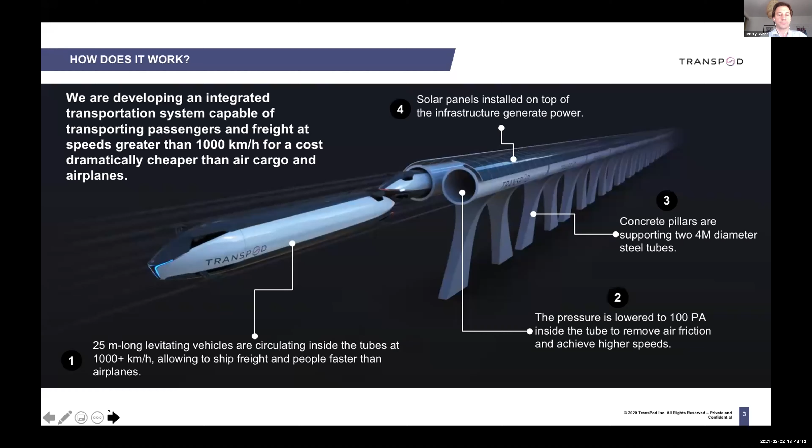I'm dealing with cats, that's probably what you hear behind me.

Briefly, the company was founded about 5.5 years ago, in 2015, in Toronto. We have operations in Italy and France as well. Kyle and I are in Toronto, Dimitri is in France, Augustin is working from his home in the Netherlands. It's global. A lot of people ask us, are you building a line in Canada, is that your main market? Well, of course, we're Canadian, so we would love to see a high-speed transport line in Canada, but there's a lot of other opportunity to explore all over the world.

For example, we've done a feasibility study for a line in Thailand. We're also exploring other countries, Australia, the Middle East. In terms of nice progress we've made, I won't spend too much time on that, but we can get back to it in the Q&A session. We are highly involved in the regulatory work at the French and European level, also a little bit in the US, and we're starting to work on the regulatory projects in Canada as well.

What is it for? As I said, passengers and cargo. We're not only transporting people from point A to point B or between cities, but we can also make good travel time. That's very important because we can replace, for example, airplanes between various cities.

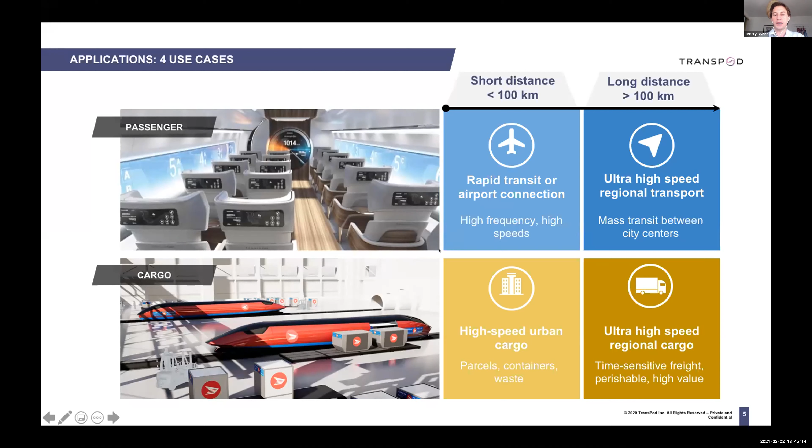That's a little bit of marketing about Transpod. Why we think we're better than the competition is because we have a few unique patents that place us above the Hyperloop world. That was the idea of Ryan when he started the company - he's our CTO. He started off with a blank page. He didn't think we should start again with existing concepts like the maglev concept, for example. Maglev exists, it works, but it's very expensive. That's why we don't have maglev lines - well, there's one in China, but that's it.

So the whole idea was to think, how do we make something levitate in a tube that's almost vacuum? How do we transmit power to the vehicles? How do we make that happen? And that's how we had some key ideas. Well, Ryan had some key ideas, and some people like Kyle, for example, put these ideas literally in motion. But he'll tell you more about that.

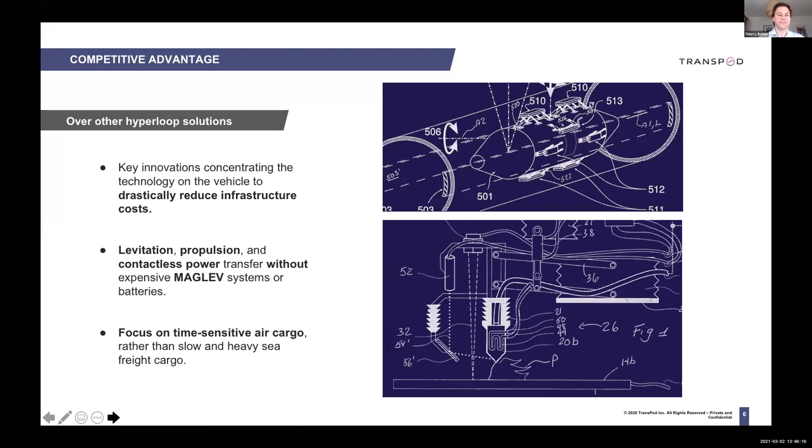In Canada, we would love to build a line between Toronto and Montreal with a stop in Ottawa. That would be nice, but it's a little complicated since we're dealing with two different provinces, so we're still working on that project. But today, the most advanced project for us in Canada is a line between Calgary and Edmonton. We managed to get the government of Alberta on board with the project, so they're officially supporting us.

Part of the feasibility study is also to see if there's interest in having a station in Red Deer, a small city halfway between the two main cities of Alberta, but it comes with a cost. That's why we're conducting this feasibility study, to see if the line is profitable and if it's interesting to have an additional station in Red Deer, for example.

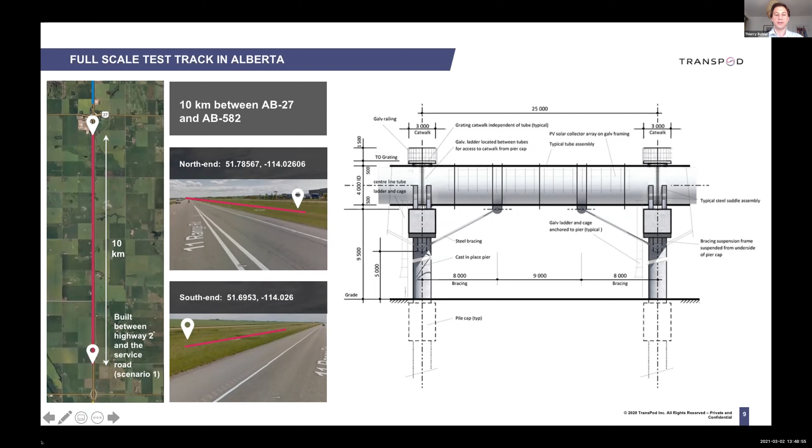We quickly realized this is going to take a few years. So the main milestones for us are 23, 24, to have the certification for the transportation system in Canada. Then we can start building the test track, and finally we can start building the line. Right now we are hoping to be able to operate the line in 2031, about 10 years from now.

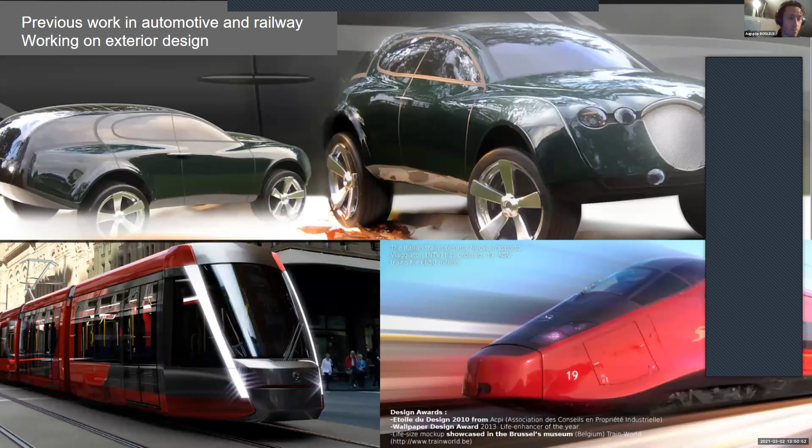So hello, I'm Augustin. I'm an industrial designer, I'm the director of design, and I will present you what design brings to Transpod. I'm 39, I'm from France, and I live in the Netherlands, as Thierry said.

I have a lot of experience in transportation industries. I started with car design for Jaguar, then quickly moved to the railway industry. I joined the company Alstom, where I designed trains for 15 years. I designed metros, tramways, mainline trains, high-speed trains, and also freight locomotives. It was great to create vehicles for various locations in the world.

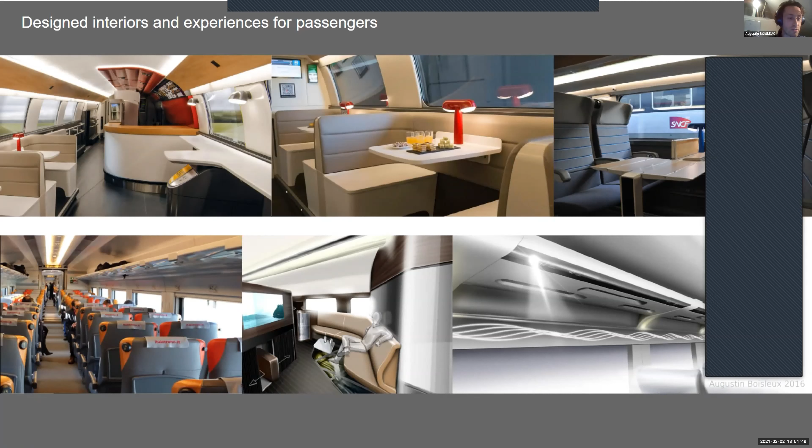Not only the exterior—I spent a lot of time creating interiors too, from economy to business class. I learned a lot on how people move and what could be done to improve their experience. However, I had to work within the limits of a system shaped for centuries. There are a lot of limitations that can't be overcome due to existing infrastructures, technical constraints, regulations, restrictions, etc.

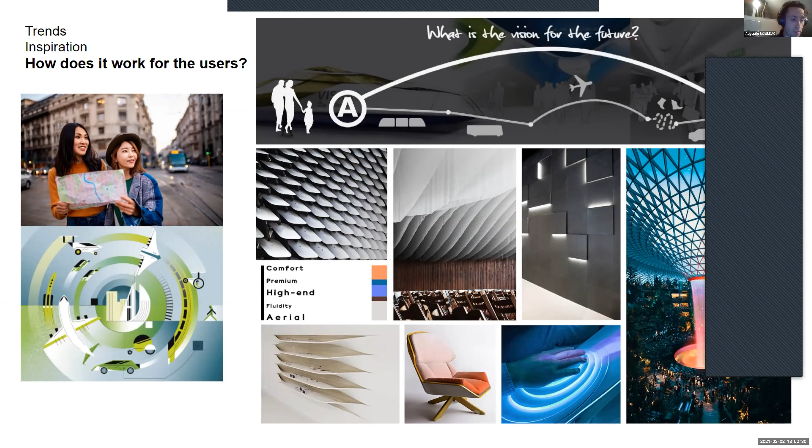So we also create scenarios where we try to imagine all the passenger types going through any kind of situations, to make sure we improve the way people travel. We keep in mind all the inconveniences we can meet when using trains and planes, to make sure we solve them. We keep a holistic point of view—the tangible part, the digital part, the infrastructure, the vehicle, the other modes of transportation connected to it, etc. We try to map everything to make sure we have the best overview when creating solutions.

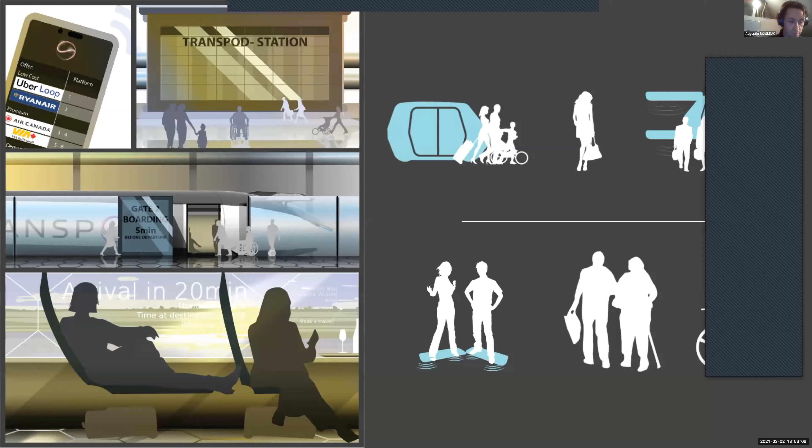So from that analysis, we start conceptualizing and shaping our ideas. It's hundreds and hundreds of ideas that are shaped, simply using at the beginning a pen on paper. We integrate step by step all the engineering inputs provided by my colleagues. Everything from the previous analysis is central, and the goal is to create a product that is the best solution—especially, this is the industrial designer's goal, to create a product from the user's perspective. That's what we really try to solve.

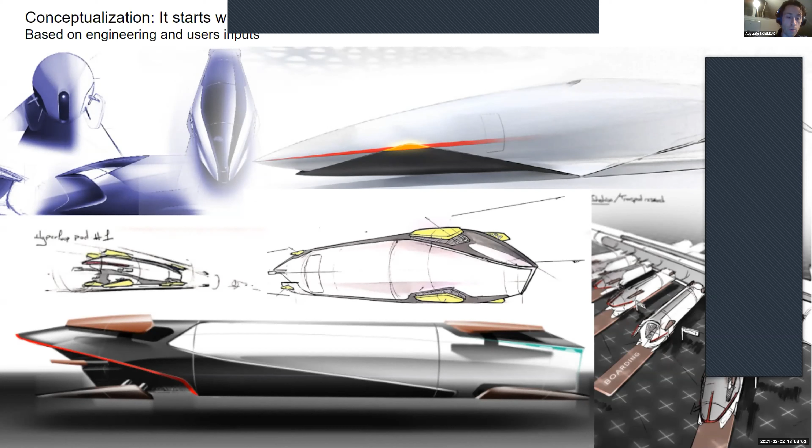So it's also important to give it an inspiring look that carries its function. It has to show its function and communicate its value, as well as the company's value.

For the interiors, the process is the same, but we have a greater focus on the passenger experience. We first need to develop the most optimized architecture that will allow a high level of personalization to meet the different needs and future types of travel. We want to make sure that even when the system is saturated with passengers, the experience will still be superior to what already exists.

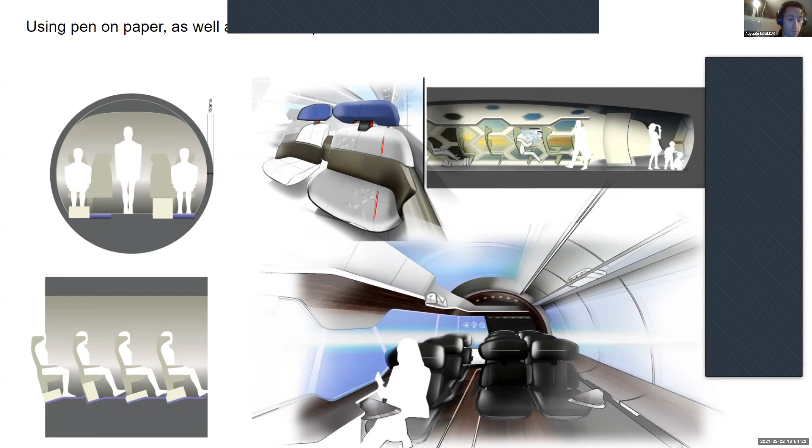Of course, everything here is still preliminary work, but it's going on step by step. So after the sketches come the 3D modeling step, where we define more precisely the different aspects of the vehicle. We put together all the engineering inputs and check how it works, and try to keep the vision alive.

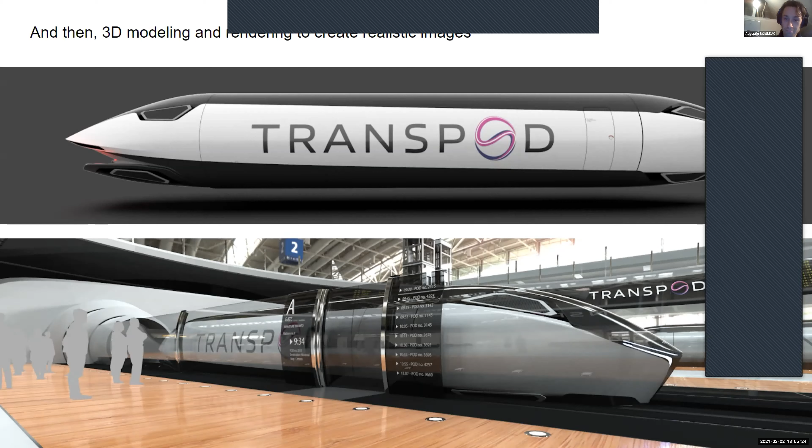And yeah, coming soon to your place. Thank you.

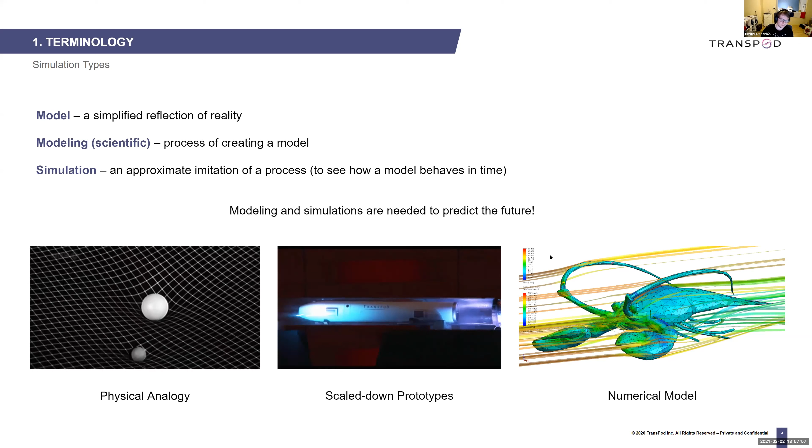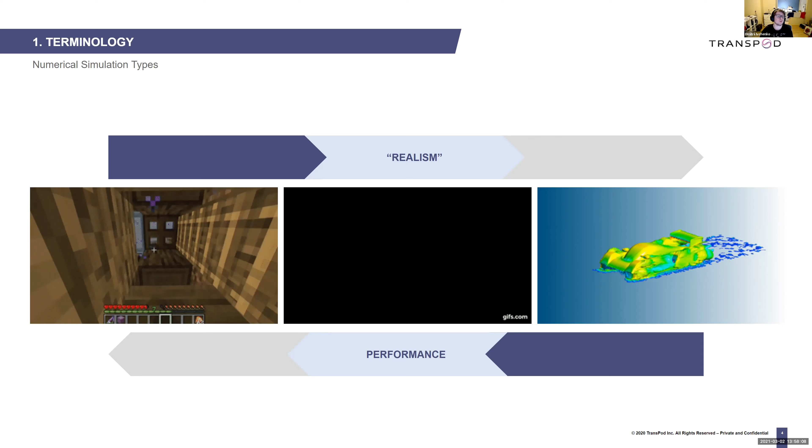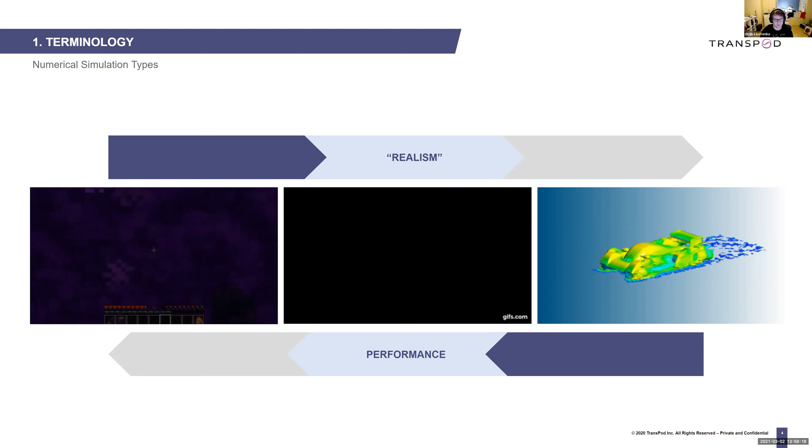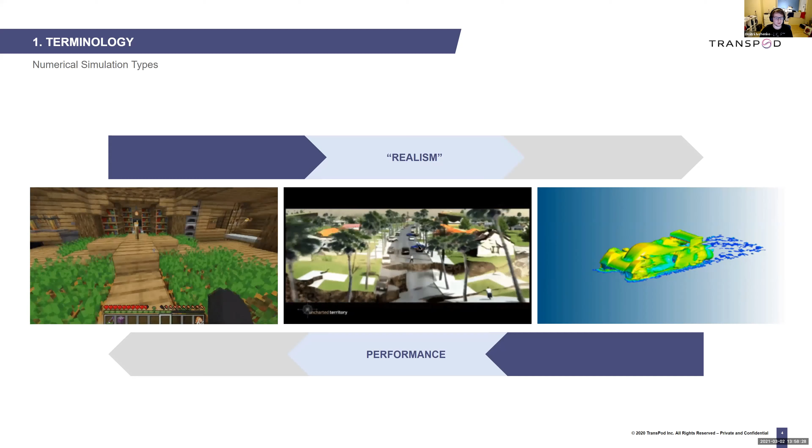Numerical models could be roughly split into three categories based on their degree of realism and the computational power required. On the left of the spectrum, we have video games, the least realistic physically, but they can run in real time so they don't require overpowered computers. In the middle, we have visual effects and computer graphics, where the goal is to look realistic but not necessarily have realistic physics. Thus, we require more computational power, like days and months of computation to produce these pictures.

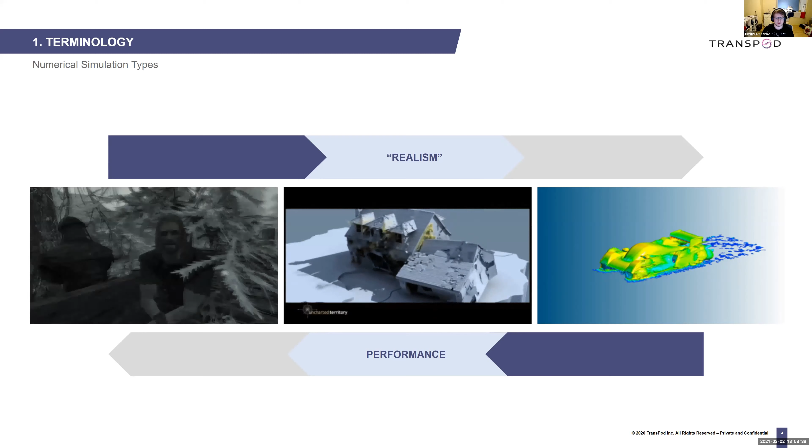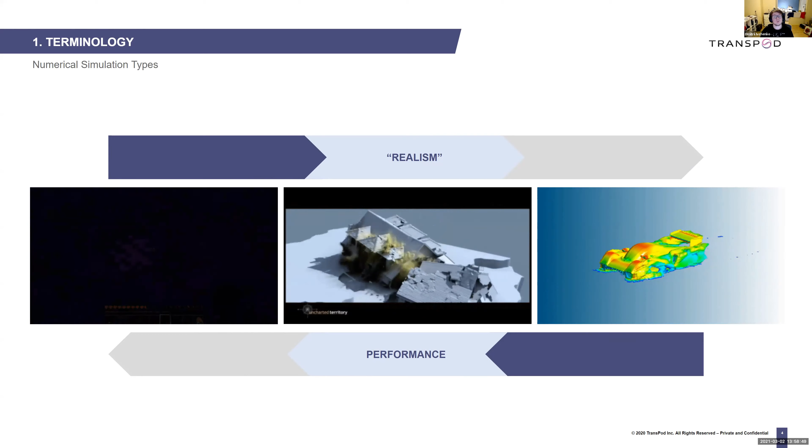And on the right part of the spectrum, we have modeling for engineering and scientific purposes. These kinds of models could be potentially the most advanced, but in the worst case they can require from days to months or even years of simulation time.

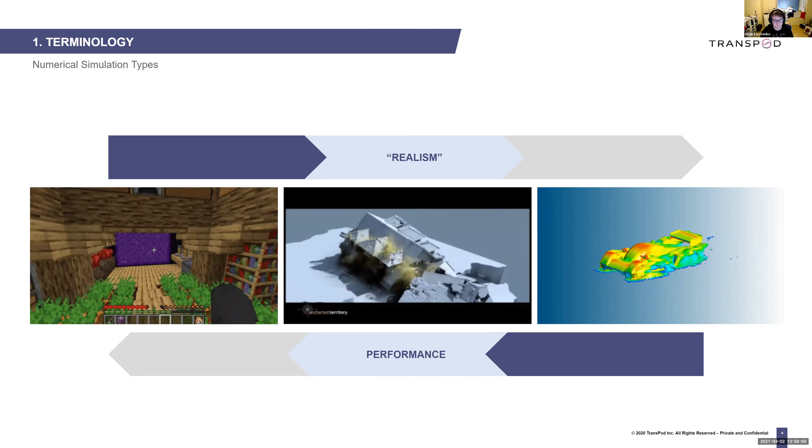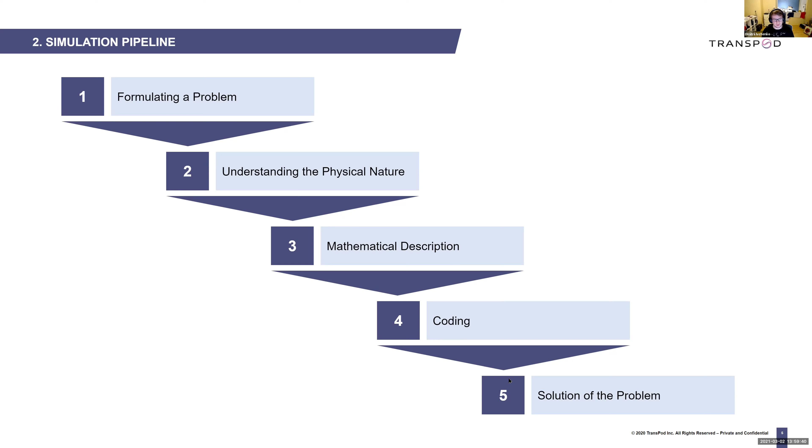But regardless of whether you'd like to make a video game engine or simulate a vactrain, you're likely to follow the same algorithm. First, you've got to formulate the problem you'd like to solve. Then you should analyze the physical nature of this problem. Next, you should describe the physics using mathematical apparatus. On the next stage, you have to interpret this mathematics to the computer—write it in a form the computer understands, basically by writing a computer program. And then you have to use this program to solve the initial problem.

So now let me show you how it's done based on the tasks we have at Transpod. Here is a simple example about predicting the tube surface temperature when it's exposed to direct sunlight. I received this task because our engineers needed to estimate the maximal temperatures of the tube and also to see whether they should paint the tube or if it's fine unpainted.

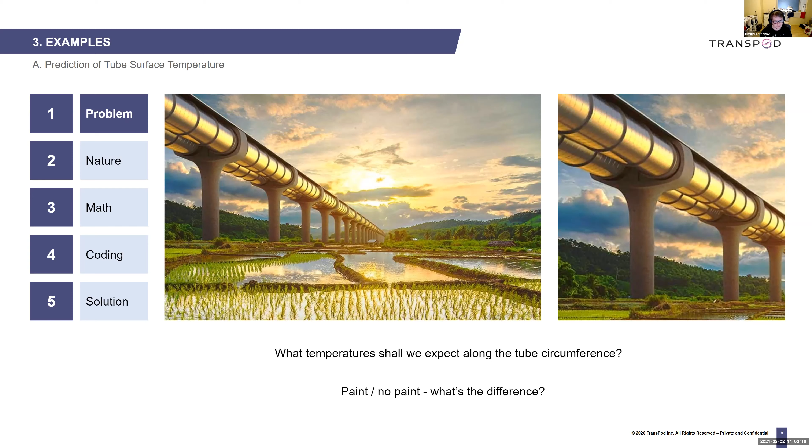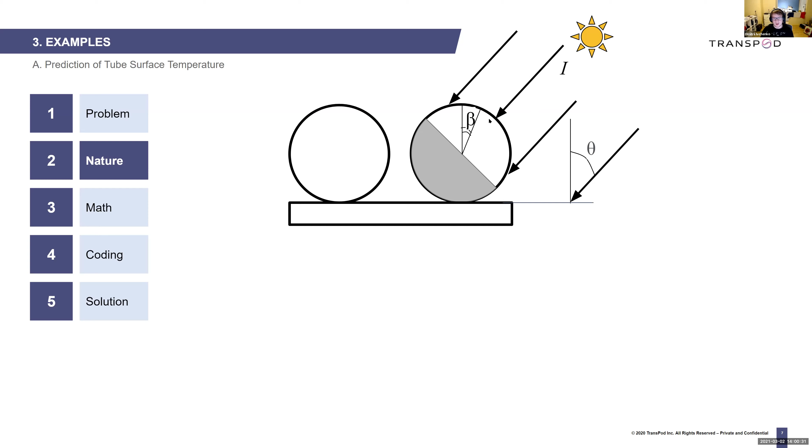So the first thing I did was analyze the nature of the problem. Here are approximate representations of the tube. Here's the sun and the sunlight hitting the tube surface. Let's consider a small segment of the surface and see what happens here.

So we have sunlight arriving at the surface. Part of it is reflected, another part is absorbed. The absorbed part heats the surface, so it's an energy gain. At the same time, the same piece of tube loses energy due to heat exchange with the surrounding air by convection and also by thermal radiation. So this forms an energy loss, and the resulting tube surface temperature could be found within this balance.

So if we write the well-known physical laws that describe these processes, we can get such a balance equation. I won't describe every letter here—all you have to know is that there is only one unknown here, the surface temperature. And it's up to us to solve it and find the result.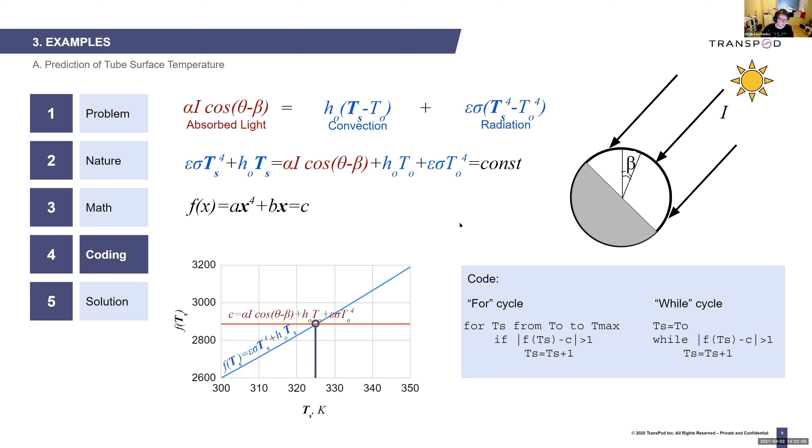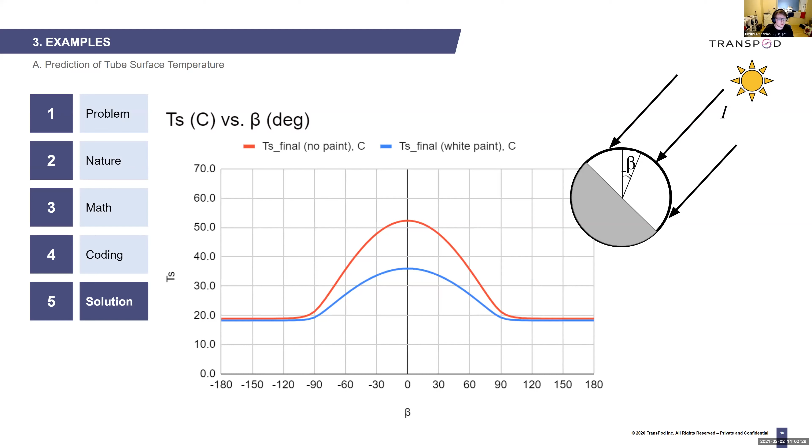Now let me show you a more complicated example, really briefly. It's the main thing I do at Transpod. It's about fluid dynamics, or hydrodynamics, or aerodynamics.

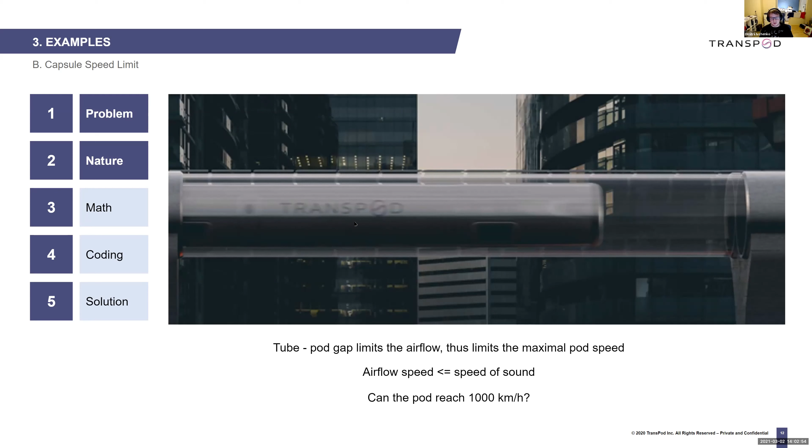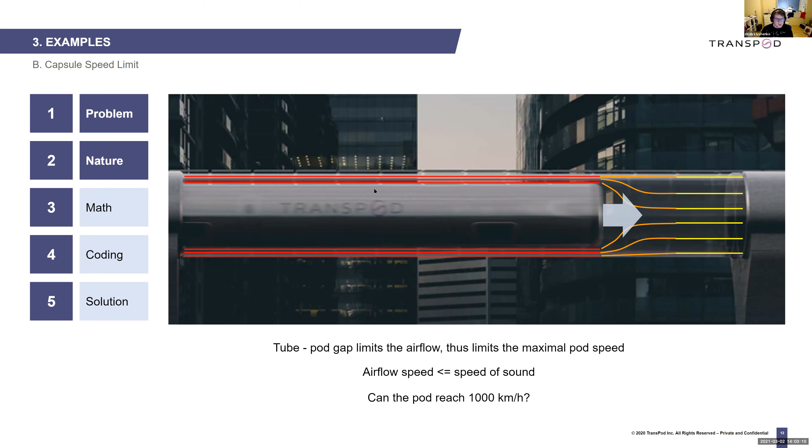Let's consider a pod that moves inside the tube with a high velocity. When it moves, it displaces the air, so the air has to squeeze through this gap, and while squeezing it accelerates to high velocities as well. It appears that the velocity of the air that squeezes through this gap is limited, and this limit is the speed of sound.

This creates a problem because it limits the maximal speed our vehicle can reach. So the question we wanted to find the answer to was whether it's possible to reach 1,000 kilometers per hour, as it's a big marketing point for our vehicle.

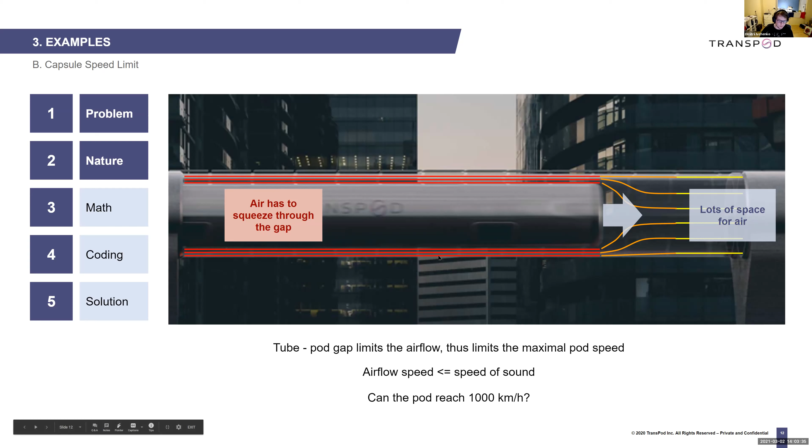In order to do so, we have to solve this fancy system of equations, with these three being the most important ones. These are equations that describe air velocity, called the Navier-Stokes equations. Believe me, this system of equations is as scary for me as it is for you. So usually we skip the coding part and just buy pieces of software that are capable of solving it.

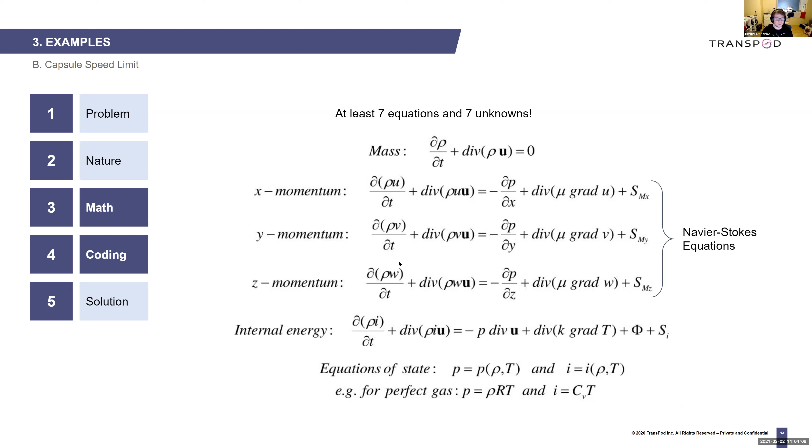All we have to do is build a 3D model of the pod and of the tube and let the code do its work. So here are some of the results. I can briefly explain what's happening here.

On the bottom left, you can see the pressure fields. When the vehicle moves from left to right, it compresses the air in front of it. Sudden compression causes heating of the air, as you can see in this picture, where the air in front of the vehicle is quite hot—about 100 degrees Celsius, which is good because in hot air the sonic speed is faster, about 400 meters per second.

On the right picture, you can see the air velocity, and in this gap it's around 300 meters per second. By comparing this 300 with the sonic speed, which is 400, we've proven that there is no limit so far, and our vehicle could indeed reach 1,000 kilometers per hour, or maybe even more.

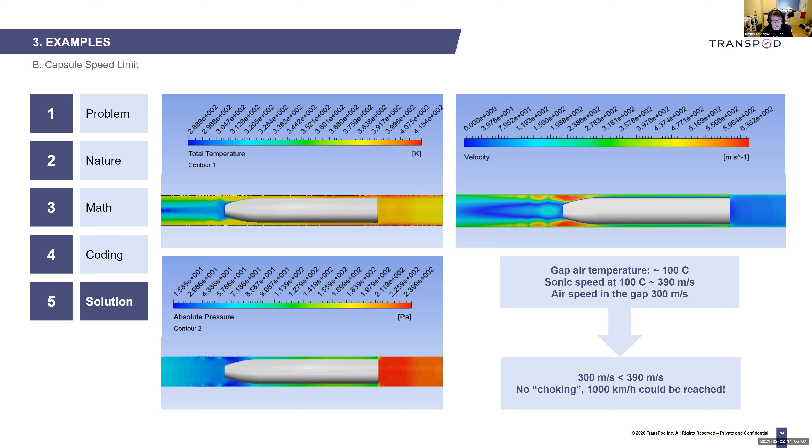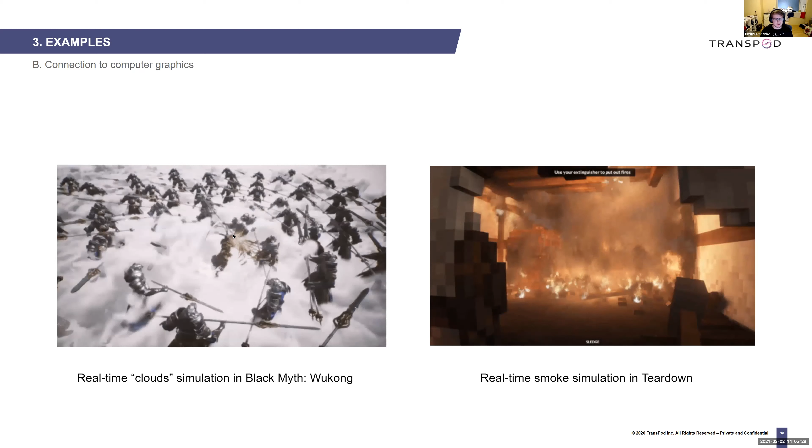Navier-Stokes equations are rather heavy, and usually they cannot be solved in real time, but now, due to advances in computers, some real-time simulations are possible, and there are even some games that solve these equations. On the left, there's cloud simulation using Navier-Stokes equations, and on the right there's some smoke simulation. Okay, thank you for your attention, and now Kyle will tell you about mechatronics and the hands-on approach.

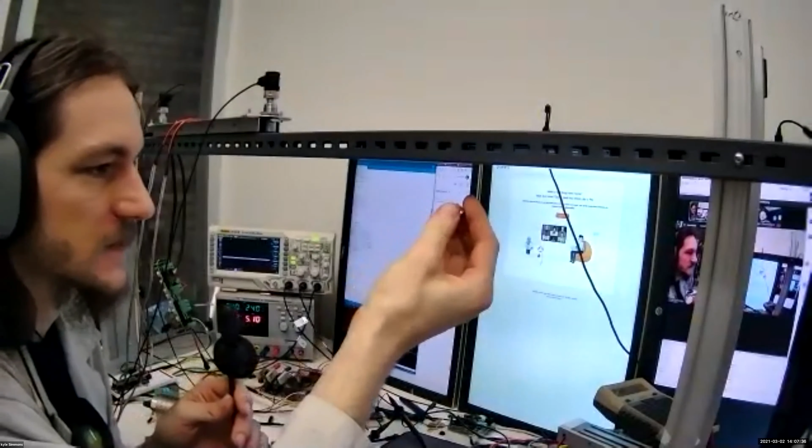So how do you make something float with a magnet, right? If you take a magnet and put it close to something you know it'll stick to, it just jumps right for the rail.

There's not really a sweet spot where you can keep that magnet and it will just float there. It always wants to run off on you.

So, okay, what if I have a magnet where I can adjust its strength? Kind of like, maybe at home or following a YouTube video or even in science class, you've built one of these. It's just some wire wrapped around a nail. And if you touch these wires to either side of a battery, you get an electromagnet. You can pick up paper clips and stuff. And there's all kinds of different forms you can build these into, depending on what you're trying to achieve.

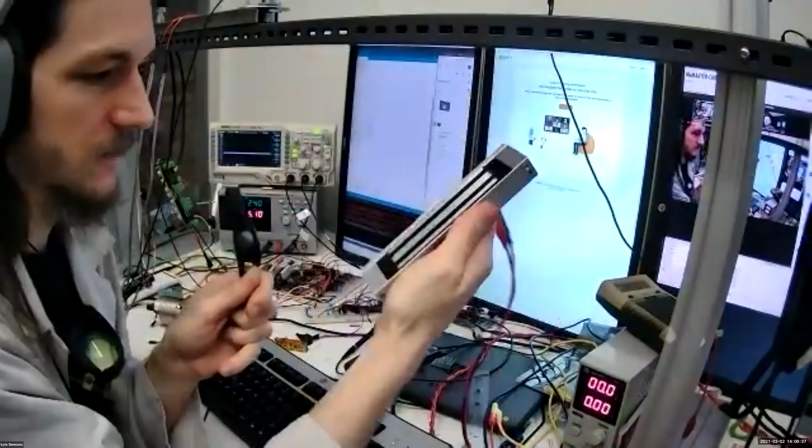So this is another electromagnet I have, and it's hooked up to an adjustable power supply. So it's like, all right, if adjusting the distance doesn't work, what if we adjust the strength of the magnet? So I'll put the mic down and see if I can get this magnet to float here by adjusting how much power we give it.

And I could keep doing that for the next hour. Still same problem, it won't hover there. It's always going to want to stick or fall.

So what we need in addition to an adjustable magnet like an electromagnet is we need a control loop and a sensor. So what that means is we need a way to measure how far that magnet is away from our rail and adjust how much power it gets really, really quickly.

So that's kind of like when you're in the shower, setting the temperature, and the water's too hot. You close off the hot water tap until, oh, it's a little too cold now. And then you open it a little bit. Now that's a little too warm. And you close it. You keep adjusting until you hit that sweet spot.

And then someone upstairs starts to have a shower and it starts to get cold again and you have to adjust it again. But the idea is you're taking a measurement with your hand or your sensor, thinking about what needs to happen, making a decision, and then affecting it. You turn that tap to adjust how much hot water you get.

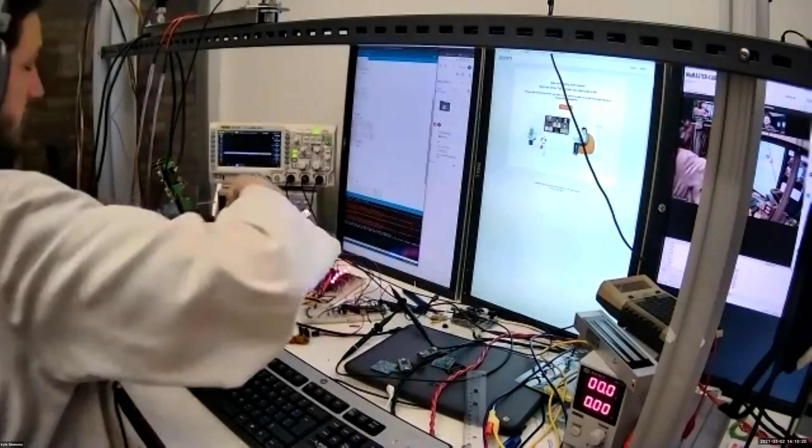So here I have a setup that does something like this, but it does it with sensors and electromagnets. So on the ends of this apparatus, I have two little sensors, which are kind of like eyes or fingers, specially designed to detect exactly how far away they are from a piece of metal.

You actually might be able to see on the scope back there that purple line jumping up and down. That's the output from the sensor, telling our computer exactly how far away we are from the rail, and adjusting how much power the magnet gets.

So if I bring this up here, I have to balance it on one end. There we go. And it actually hovers just below the rail because it's taking a measurement, making a decision, and affecting the output so quickly that it can actually make it float.

So in this case, it's actually making a measurement, making a decision, and changing the output 5,000 times a second, which is pretty quick. That's a lot of processing happening really quickly.

On the full-size vehicle, going at really high speed, ripping down that pipe, we'll actually be taking measurements at least 30,000 times a second. So at that top speed, that means we're still measuring how close the limbs of the vehicle are to the rails every couple millimeters. Even if it's traveling 1,000 kilometers an hour, we still check where it's positioned every couple millimeters.

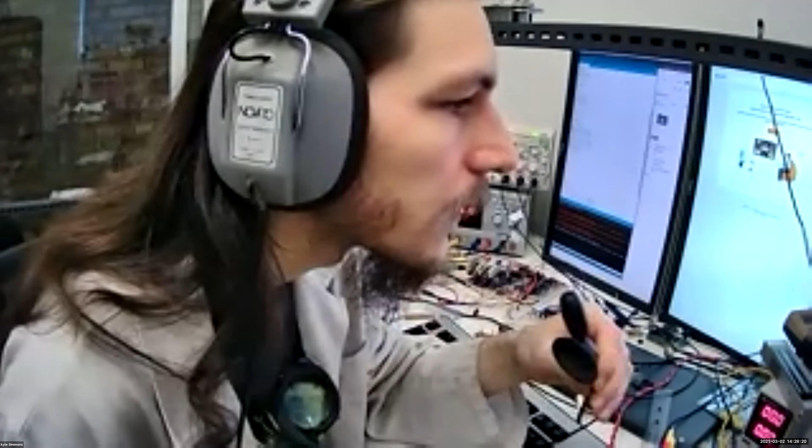And Albert, if I can, last question, very last question. So power backups, redundancies. Yes, of course, Kyle can talk about redundancies. Oh yes, there are several power redundancies in the vehicle, both for really high instantaneous power and for stuff that will run for hours if needed. We'll have life support systems for hours, lights on, all that kind of stuff, no problem. But for really high power, for levitation and thrust and all that other stuff, we have backup systems at all sorts of different levels.

There's many redundancies. In case there's no power anymore in the system, there's an emergency landing system, wheels on which the pod can land and roll safely until it stops. And then, as I said before, we put back the pressure in the tube, we open the doors of the pods, we open the doors of the tubes. There's going to be doors every kilometer, every 2 kilometers. It's part of the negotiations or discussions we're having with the regulatory bodies.

But it's similar to a tunnel. Just imagine you were driving into a tunnel - if you're stuck, every 750 meters, every 1 kilometer, there's a safety escape on the side of the tunnel, and then a safety tunnel from which you can escape whatever infrastructure you're in. So it's going to be very similar. Of course, if you're in the countryside somewhere, as if the train stops between Toronto and Montreal and we're all stuck in Kingston, but it's a nice place to visit.